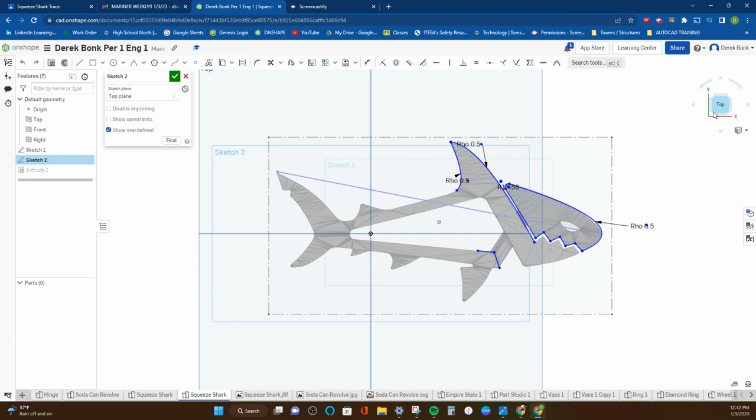Hey everybody, welcome back. This is going to be part 2 of 3 parts for this particular project.

What I'm looking for everybody to try with a job like this, and I hadn't given a specific video for you to start, is for you to decide on your own what tools you prefer to use to sketch over the top of things or just sketch in general. You don't have to be precise when you're tracing something like this, except for specific dimensions. If we're going to 3D print something like this,

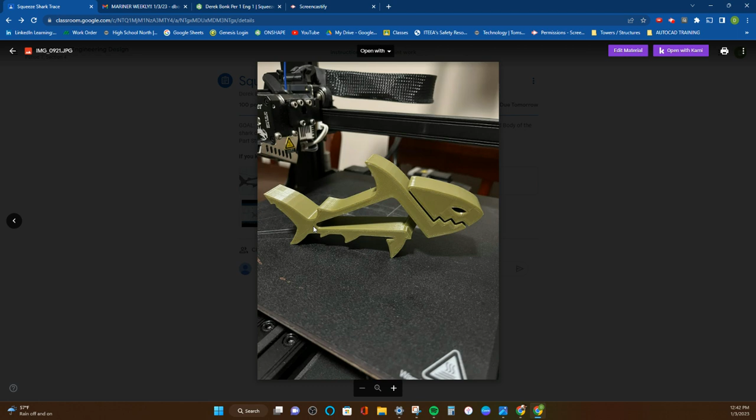I'll show you the photo again. This back here has to be printed thick enough to actually bend and not break. And then the parts that connect have to be spaced right so they move and don't fuse together when they're being printed. And it prints on its side. So this is a bridge that runs through the air through an opening that you cut or loft and remove in this center segment or bottom jaw here.

And then this design can be modified and turned into anything. You can recreate the whole thing and create whatever creatures you want and make them bendy as long as you have the right kind of placement of these parts. But what I want to talk about real quick is how you can really make this internal section here very clean and kind of perfect with the right tracing steps.

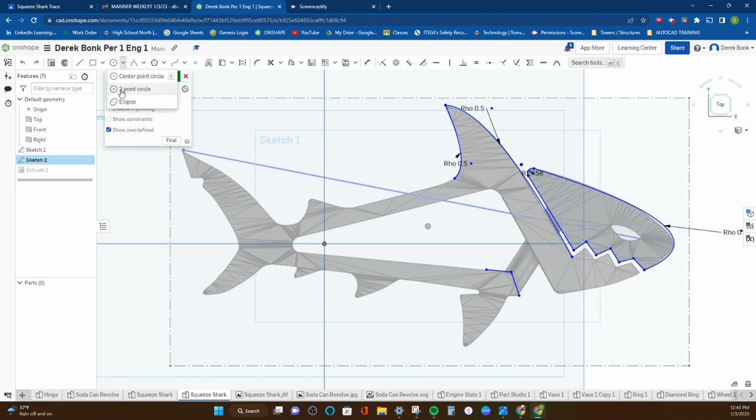So this is going to be using a whole different series or different philosophy where you're using geometry to build. Like I'll use a circle and then I'll cut away a section of it when I'm done. So tracing something like a semicircle can be done with a 3-point circle tool, which is super impressive. You can hit any 3 points of an arc, and it's going to trace that out and create a perfect circle there. Same thing goes over here.

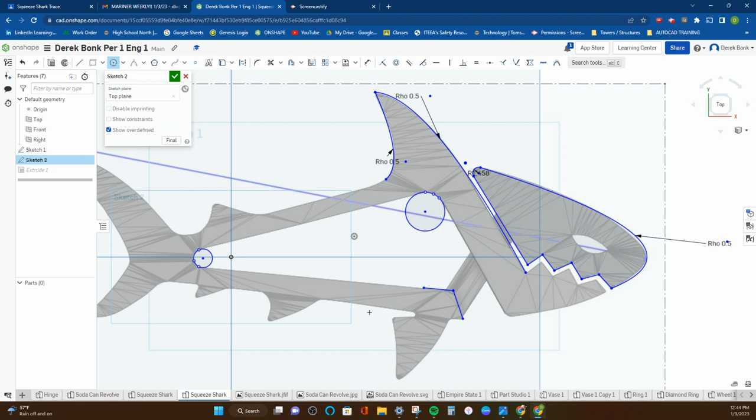You can make another one. Just any 3 points on that. Anywhere you'd want to do this even later on. Something like down here. Somewhere like over here. Anywhere you see something like a perfect semicircle, sometimes it's really easy to just build it with different tools in a way where you can cut away sections of line.

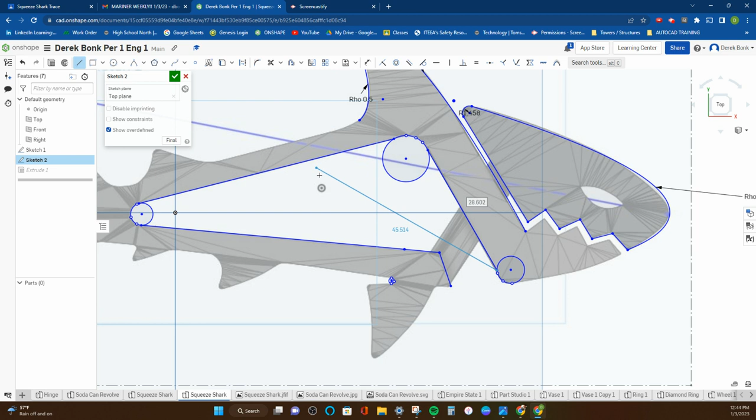So I'm going to draw just a straight line connecting these two circles out here. Escape the line, start another line, connect it from the outside edge. Got to be careful with where these place. The end point there. Hit the L. Connect another line from here to here. And I'll just finish this up with, I gotta escape that line. It's a little bit wonky where it placed, so pull it.

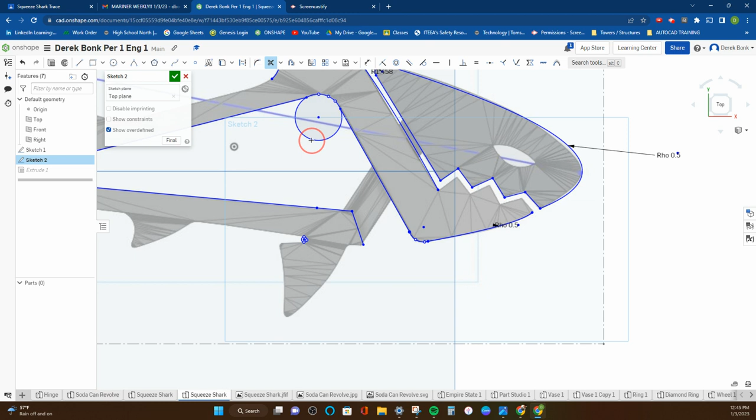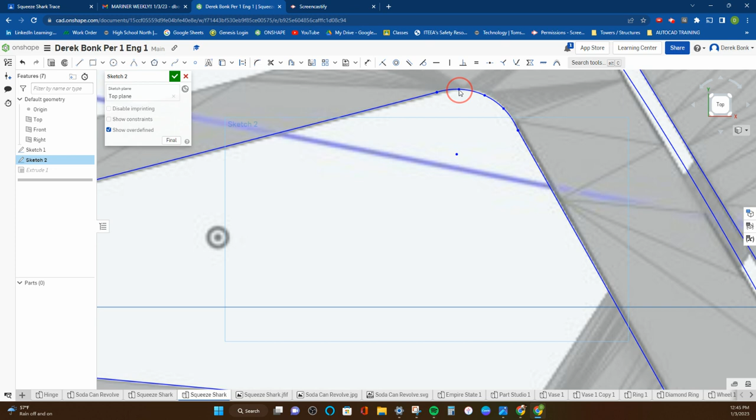Then conic arc I'll use from here to here, just so I can show you how you use that scissor tool. Finish that up, and then you can cut away these and trim away the sections of this circle that you don't need. It's just, again, one way to do it. There's a lot of different ways that you can escape out of these tools and pull things around. You can always adjust stuff as long as it's not black and locked in geometrically. Figure out how to straighten it out and clean it up.

But the rest of this could actually be done with things like arcs.

Apologies, my throat is a little bit messy.

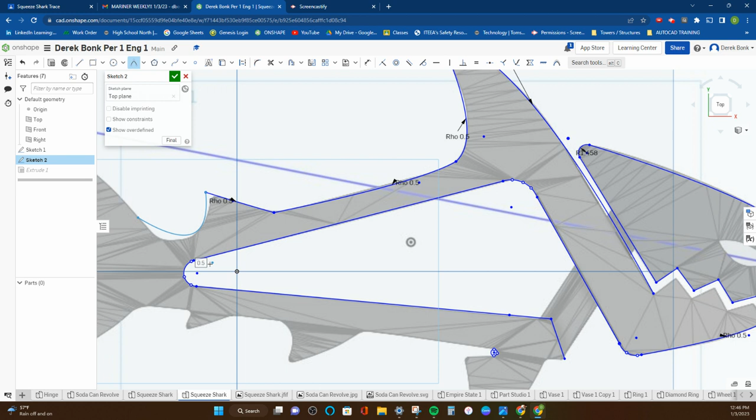One thing with sketch tools is remembering you can go back and round things over and change the shapes later on. So something like that can do. Definitely doesn't have to be perfect. Just showing you how fast things can be made without having to be super selective and picky about it.

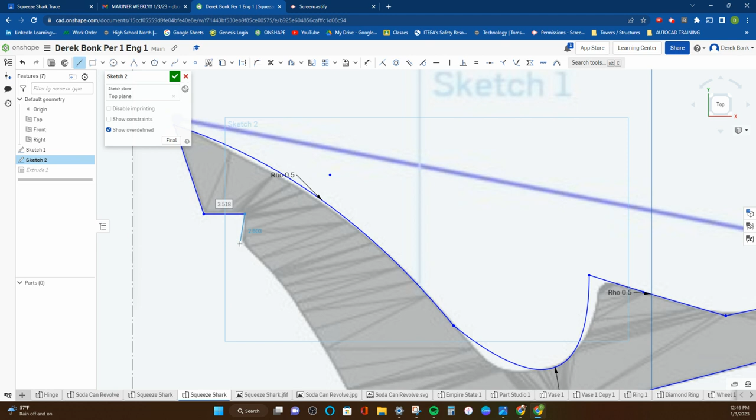I'm trying to be a little bit patient about transitions from tool to tool, because it is mental energy to get in here and continue to decide and exit and enter into different tools. But I got to right click and escape my line here. So I use some straight lines there and I go back to the arc. You can say I can pull an arc in here. It doesn't have to be a perfect point.

Actually, you know what? Escape conic. Put a conic in here. Enter another one in here.

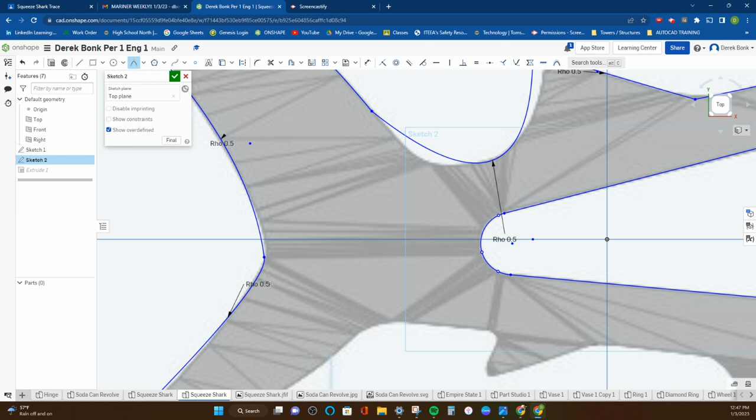Things like transitions, if you want to do stuff like this, you can zoom in close and see that it's going to get a smoother point in here if you're close and careful. It's pretty quick once you get the hang of interchanging the tools and knowing how to escape out of them to then go in and modify them if you miss points.

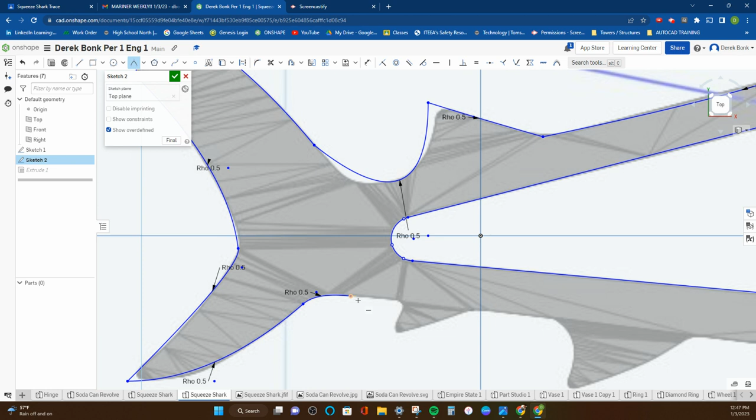Making decisions like, is it easier to round those over later? In this case, yes, it is. So I can use straight lines. I could even go in here and round stuff like that over later. This makes more sense for a conic. Escape out of the line, make another conic arc.

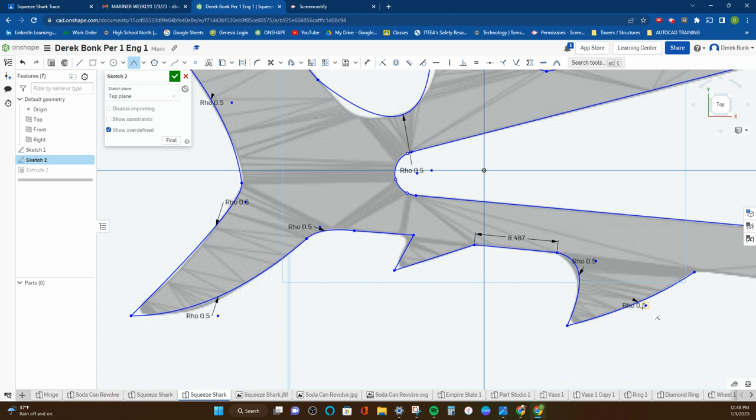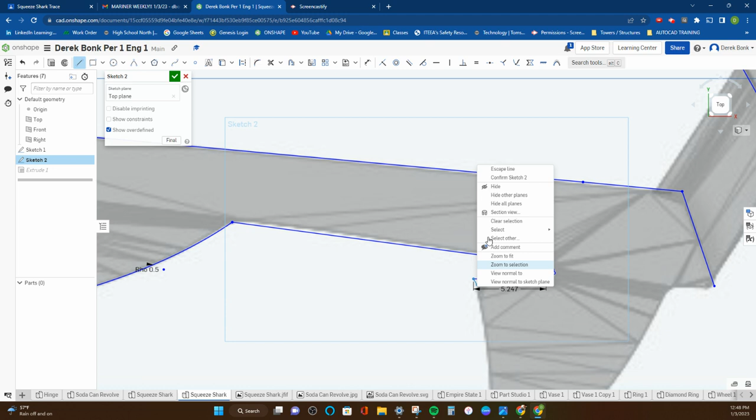The line tool is still on there. Enter, escape.

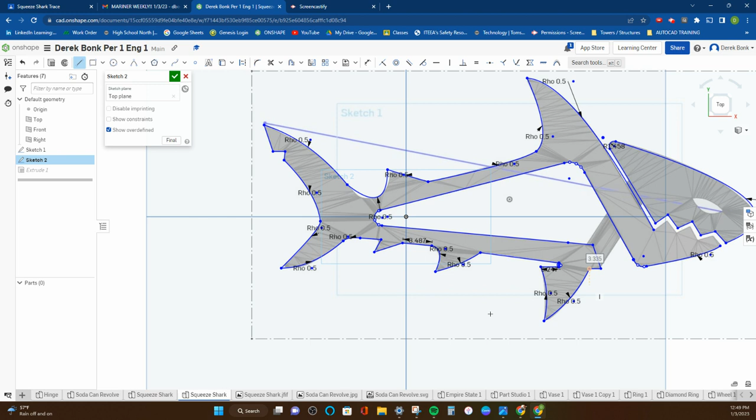Cool. Did we get it? Here's how you know: it's still open somewhere because it didn't turn gray. I still have to finish off the teeth over here. We'll be able to move on here.

Straight line. You can see these indicators coming up as we move along. You hear a lot about constraints in videos. If you're watching pro videos, I try not to go overboard with too much stuff until the timing is right. You can see parallel indicators coming up, so lines are adjacent and parallel if you want them to be, and things like that. You can start to understand the basics of the geometry and the software.

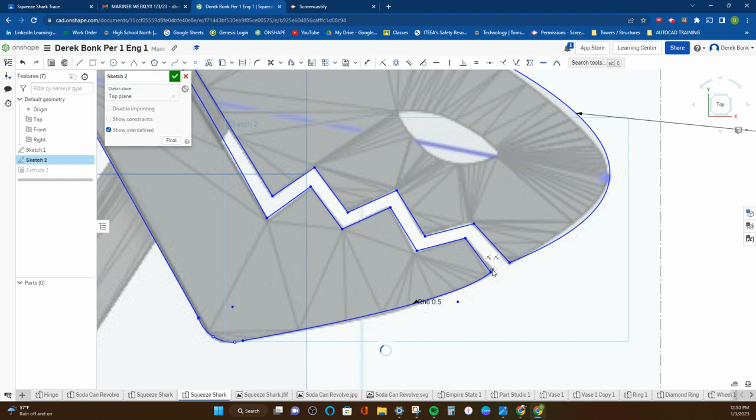And remember, you can always escape. Use your white arrow here and modify anything if it's blue, so you can grab endpoints, adjust. That's why you don't have to be super picky. Sometimes things will start to align and move with one another. The way to avoid that, if you notice it happening, you can hold down the shift key and it'll stop those constraints from being dropped.

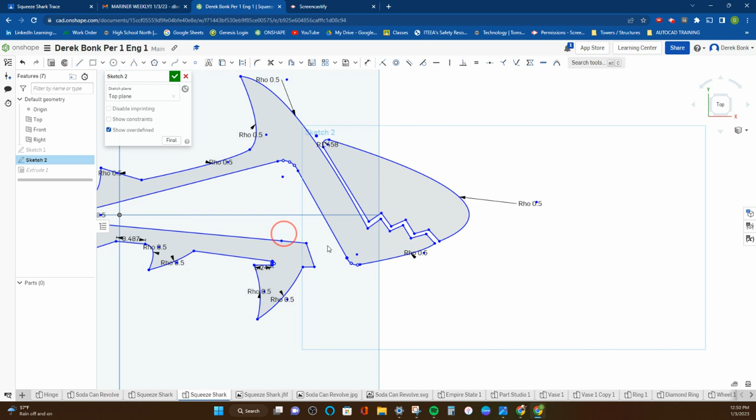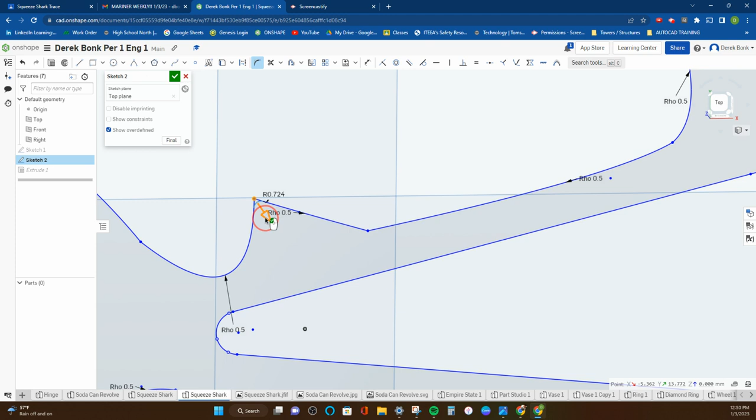But let's double check here. Yep, everything is gray because the outline is complete. I'm just going to, for right now, not spend a lot of time going back and using the sketch fillets. Once you get that, you can modify those things at will. But I'll just trim this.

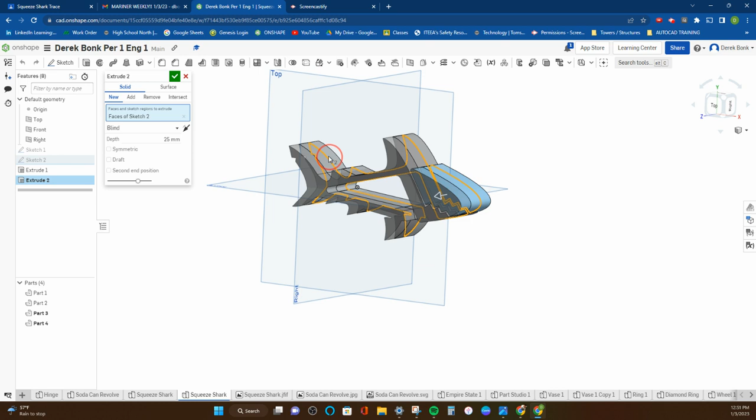Okay, so the next step here is to do the extrude, 3D phase 1 of this, and you're going to have to make sure that you extrude with symmetry. I'm going to close this out, double click on, I'm just going to delete this one so you can see it from scratch. Yeah, you're going to have a new extrude.

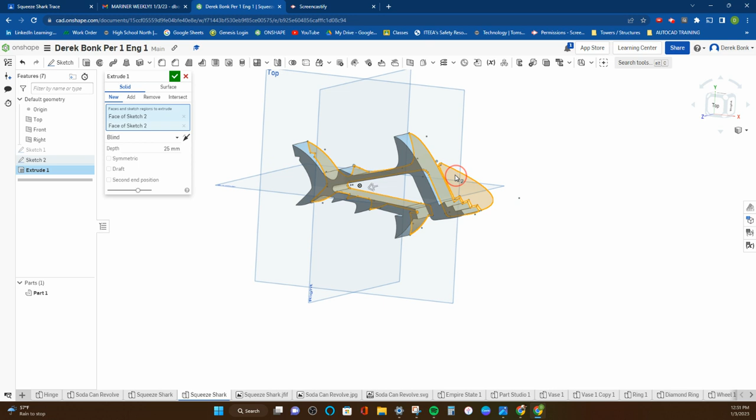I have to click both of these sections here because of what I just did. But if you don't finish the sketch, you can just click extrude. They should both pop out like this, and then you choose symmetric for the extrude. So what you'd have is a split of 25 millimeters going half one direction, half the other, and that's that.

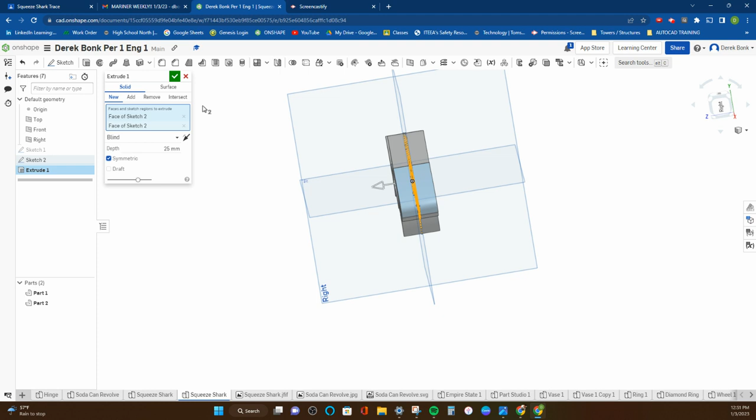So next video is going to be putting sketches on here and the other side, and we're going to use a loft remove to open up a slot and then build a neck in to connect the head.

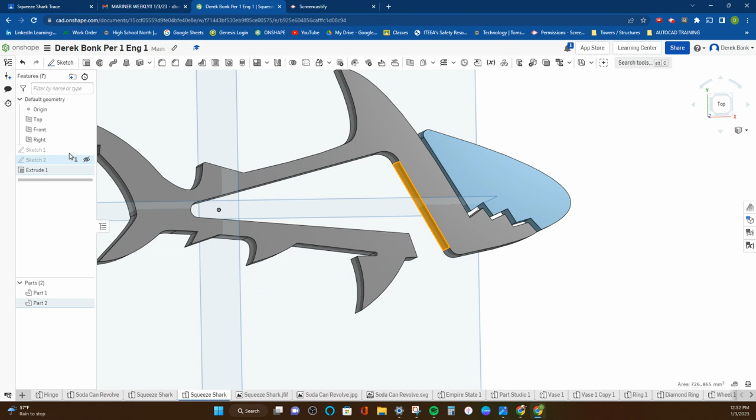We can go back in here and just real quick, one thing I forgot: it's the eye. Shark needs an eye. This is a good little review of going back in, making modification.

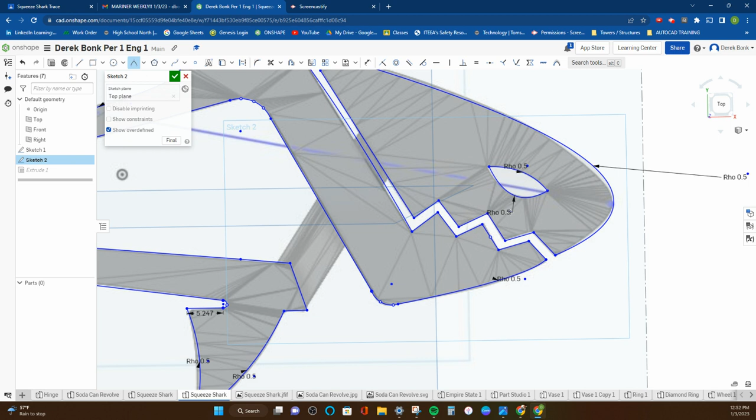Enter, a conic arc, enter, green check mark. And it's now built in because it updates. Yeah. Hide that so you can see it.

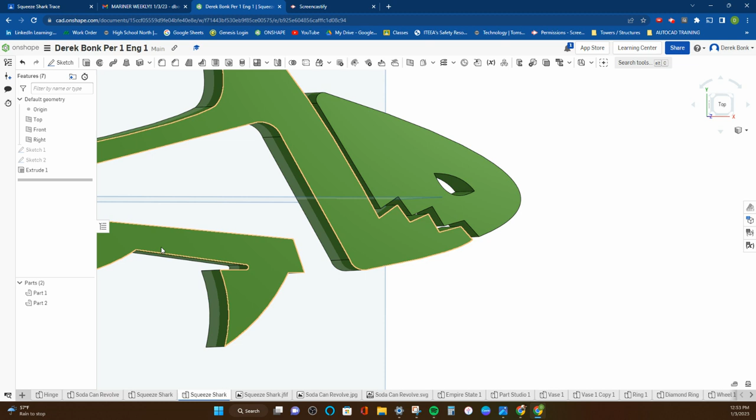And you should have two separate parts down here if you want to click both of these and edit the appearance and start to recolor it. Make it a little bit bright. Bright is good, makes it easier to design with. And then you can actually, at this point, hide these planes because they're just in the way for right now.